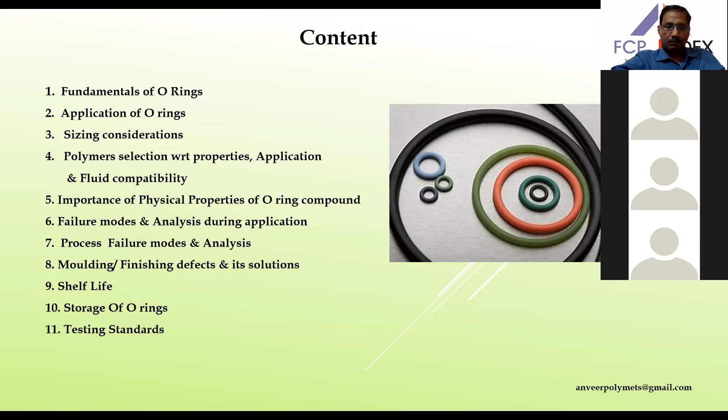So let's begin with the fundamentals. First, what is an O-ring? The name itself explains it — an O-ring is a circular cross-sectional ring molded from rubber or plastic. Why are we using an O-ring? O-rings are used to seal or block the path which may allow liquid or gas to escape.

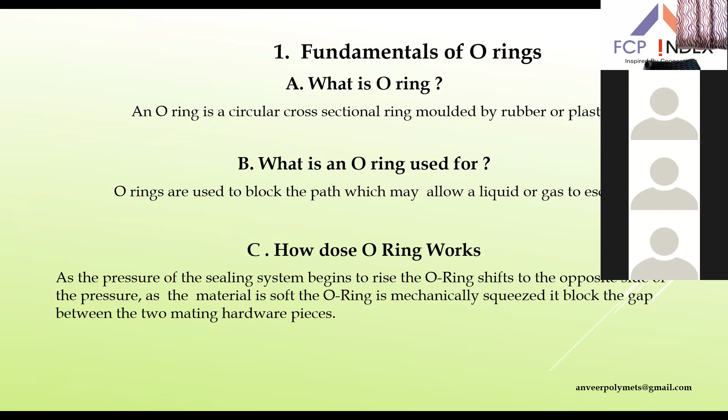And how does an O-ring work? As the pressure of the sealing system begins to rise, the O-ring shifts to the opposite side of the pressure. As the O-ring material is soft, the O-ring is mechanically squeezed and it blocks the gap between two mating hardware pieces. This is what actually happens with the O-ring during application.

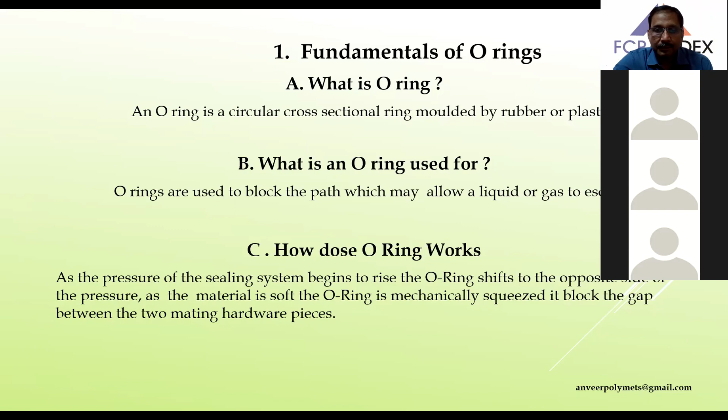Now let's move towards applications of O-rings. O-rings are applied for static applications as well as dynamic applications. In static applications, there are axial seals and radial seals; in dynamic applications, there are hydraulic and pneumatic seals, and rotary seals as well. So let's discuss more about the applications in detail.

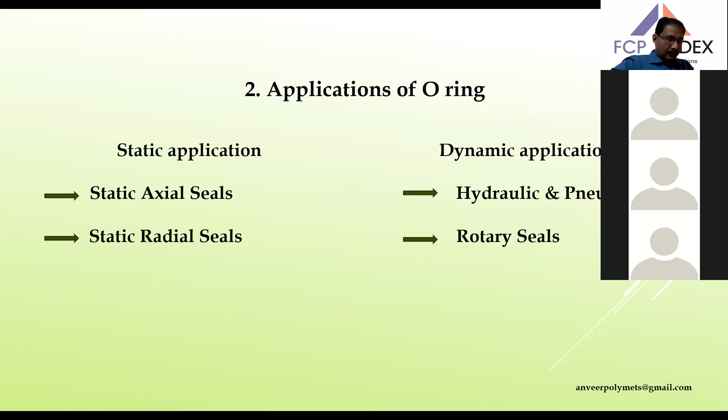So first is the static axial seal. In static axial seals, there is no movement during sealing — that's why it's called static. The sealing occurs parallel to the seal center line, that is, either the sealing is on top or bottom of the seal.

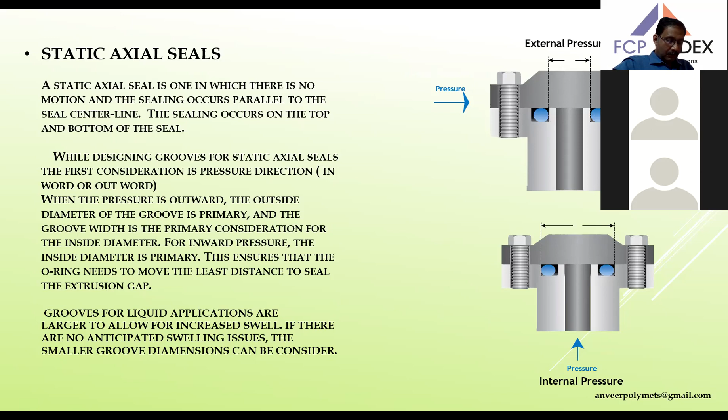So let's see the designing part. While designing grooves for static axial seals, the first consideration in mind is pressure direction, whether it is from inward or outward direction.

When the pressure is in outward direction, the outside diameter of the groove is primary consideration. And for inward pressures, of course, the inside diameter is primary consideration. This designing is important to ensure that the O-ring should move the least distance to seal the extrusion gap.

In liquid applications, grooves are larger because to allow the increased swell. If the swelling issue is not anticipated, smaller groove dimensions can be considered.

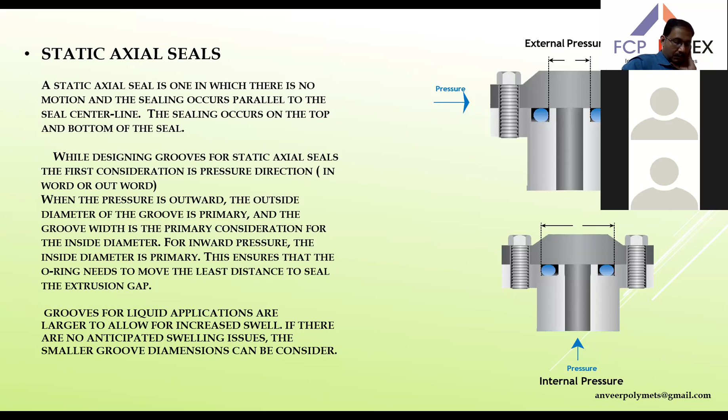Then static radial seals. In this type of applications, sealing surfaces are perpendicular to the seal, that is either on inner side or outer diameter of the side.

There are two variations of the radial seal. You can see a picture of it here. One is a piston seal where groove is on the piston, illustrated on the right side. And the second is a rod seal where groove is on the bore, shown on the left side.

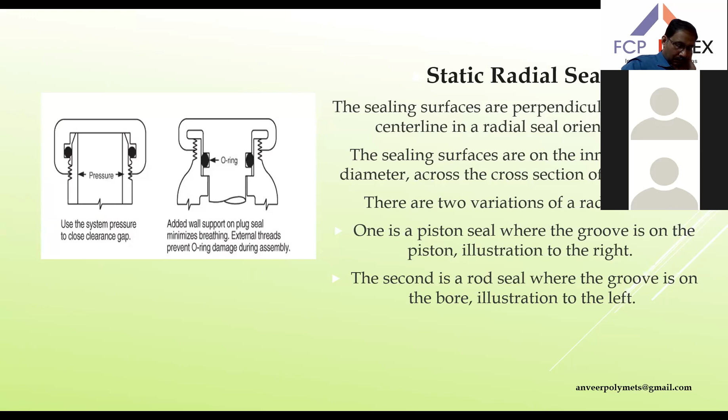Then second is a dynamic application. Dynamic sealing is basically associated with motions such as reciprocating, oscillating, and rotary motions. In dynamic reciprocating, O-ring type applications include hydraulic and pneumatic piston seals or rod seals.

In dynamic application, smaller diameter O-rings generally work well for short stroke applications. And if long stroke applications are there, then definitely thicker cross-sectional O-rings are good to perform.

There are a lot of damage modes because of the friction that occurs during sealing in dynamic type sealing applications. And for static type of O-rings, such problems are not observed because there is no friction at all.

To increase the lifespan and efficiency of the seal, the surface finish of the hardware is extremely important. The perfect hardware surface microfinish is generally between 10 to 20 micro inches.

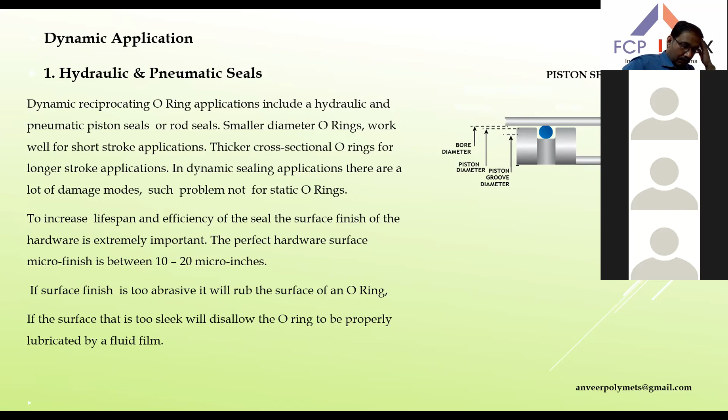A shaft hardness value of 55 Rockwell is typically required for successful rotary O-ring applications.

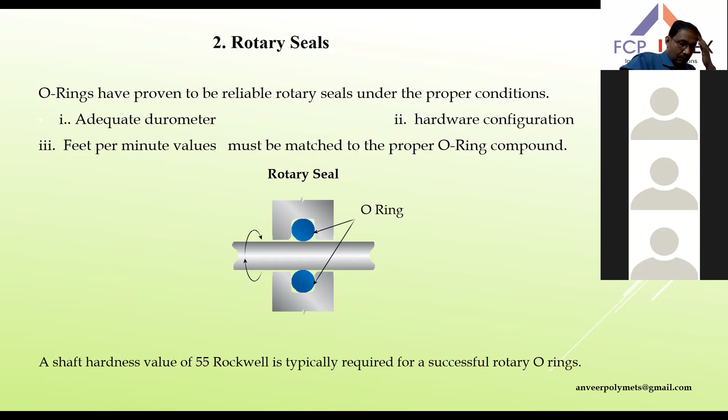So the next important part of the O-ring is its dimensions. When sizing consideration is there, there are three types of dimensions an O-ring has: one is the inner diameter, second is outer diameter, and third is cross section.

So first we talk about ID, that is inner diameter. In standard practice, ID of O-ring must be smaller than the mating hardware, so that it allows the O-ring to stretch within the groove.

Typically 2% stretch is recommended, but theoretical possibilities are we can go up to 1 to 5% also. But we always keep in mind that a higher level of initial stretch will decrease the performance of the ring. So proper inner diameter should be selected with respect to the groove diameter.

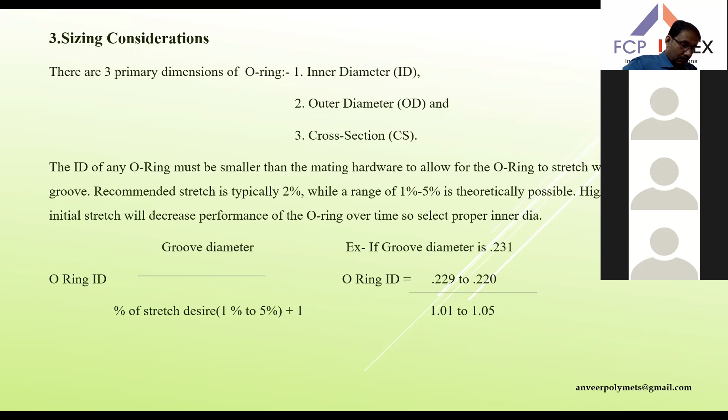So next important dimension is cross section of the O-ring. While designing, the O-ring cross section depends on the size of the gland. To create a proper amount of squeeze and to generate adequate sealing effect, the O-ring cross section must be larger than the gland height.

So the diametrical clearance, that is the gap between two mating hardware surfaces, is important because the O-ring gets squeezed into that extrusion gap and the sealing effect arises there. So that gap is important.

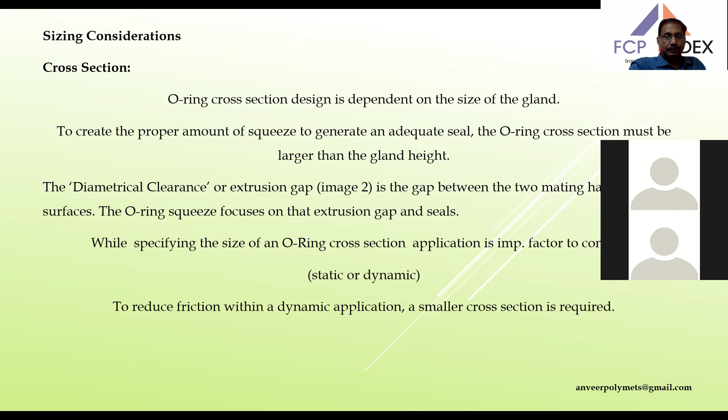Then O-ring cross section also depends on whether the application is static or dynamic, because to reduce friction in dynamic applications, smaller cross section is required. So by considering the application, we have to select proper cross section and its tolerances of the O-rings. So this is all about the dimensions of the O-ring.

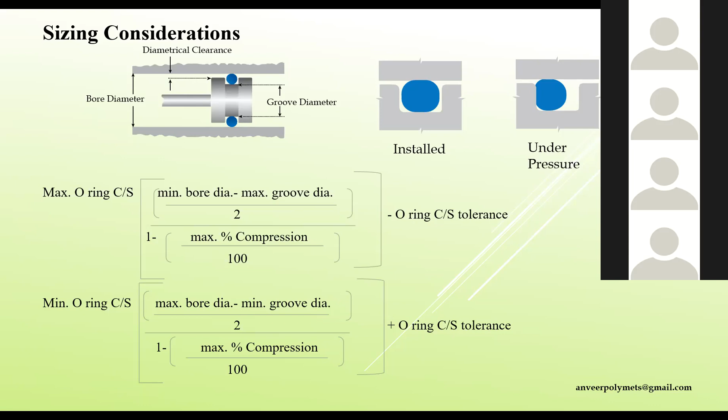Let's talk briefly about the main important factors, that is polymer selection. It's very important to select a proper polymer for proper application and proper results of our product.

First is nitrile rubber, also called NBR. General type of O-rings are generally molded by nitrile rubber. Temperature range is -25 to +120 degrees Celsius, and with special compounding chemicals, we can stretch that limit down to -40 degrees Celsius also.

Now properties of nitrile rubber. Nitrile rubber has good mechanical properties, like good tensile strength, tear resistance, abrasion resistance, elongation properties, and compression set property, which makes nitrile rubber suitable for most sealing applications.

Nitrile has an excellent resistance to petroleum-based oil, fuel, greases, and some hydraulic liquids. Nitrile also has moderate resistance to water, but good resistance to non-polar solvents. Non-polar solvents are chloroform, aromatic solvents, benzene, toluene, xylene, etc.

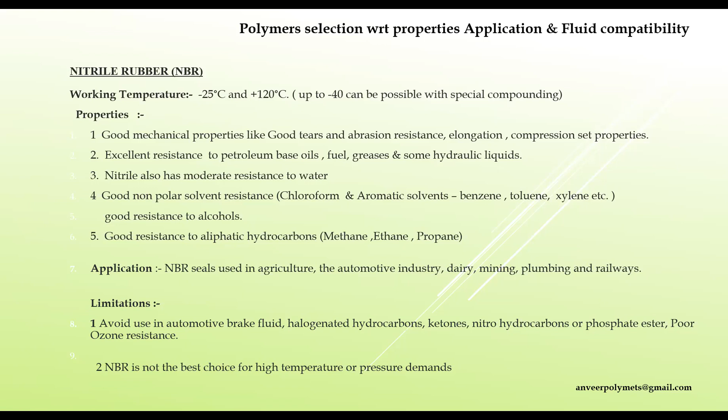Next is hydrogenated nitrile rubber, that is HNBR. HNBR is a modified version of nitrile rubber. The basic structure is the same, only the presence of hydrogen makes it something special in applications. The working temperature is -25 degrees Celsius to +150 degrees Celsius.

Now properties of HNBR. The tensile strength, tear strength, elongation, and abrasion resistance properties are excellent compared to nitrile rubber. HNBR has excellent mechanical properties as compared to nitrile rubber. It has good resistance to ozone, sunlight, and other atmospheric environments, which nitrile rubber doesn't have.

HNBR has better oil, fuel, and chemical resistance, and it also withstands much higher temperature than nitrile rubber. It has excellent resistance to many chemicals like heat, hot water, steam. It also performs well in petroleum-based oils, fuels, aliphatic hydrocarbons, vegetable oils, greases, glycols, silicone oils.

Usually HNBR is cured by a peroxide curing system, but it can also be cured with sulfur to improve flexing property in dynamic systems. Contrary to that, we have to compromise on compression set properties with sulfur curing. Peroxide curing gives better compression properties like heat resistance, also better in peroxide cure systems.

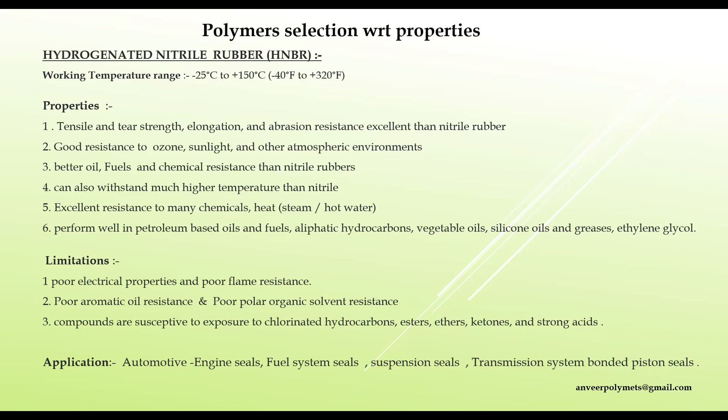Now applications. We can use HNBR seals in automotive engine seals, fuel system seals, suspension seals, transmission system bonded piston seals. So that's all about HNBR.

Next is EPDM, ethylene propylene diene monomer. Temperature range is -45 to +125 degrees Celsius. With the help of a peroxide cure system, we can go up to +150 degrees Celsius also. EPDM has resistance to brake fluid based on glycol up to 150 degrees Celsius.

Of course, EPDM has hot water and steam resistance. It has good resistance to hydraulic fluid based on phosphate esters, resistance to organic acids as well as inorganic acids. Organic acids are such as formic acid, citric acid, and inorganic acids are sulfuric acid, hydrochloric acid.

It has resistance to silicone-based oil and greases. Polar solvents such as ketone, ester, and alcohols resistance is also good in EPDM. Most commonly, EPDM rubber seals are used where ozone resistance, UV radiation properties, or weather resistance properties are required. Sometimes EPDM rubber can be compounded to provide excellent electrical resistance also.

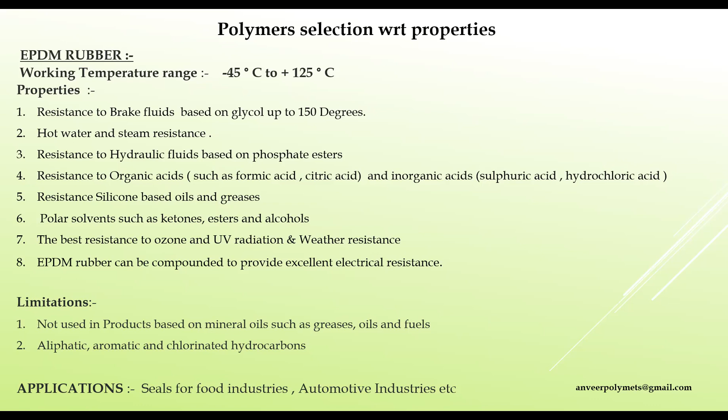Next is polyacrylic rubber, that is ACM. ACM polyacrylic has a working temperature range of -10 to 150 degrees Celsius. Polyacrylic rubber has an incredibly high resistance to hot hydraulic oils and oxidation, which makes this rubber ideal for use in hydraulic machinery and equipment.

The resistance to petroleum oils and high temperature is very good. Polyacrylic is naturally resistant to ozone and weathering, so it is superior in that area of application compared to nitrile. For weathering resistance, polyacrylic performs well compared to nitrile. It also has resistance to mineral oils.

Limitations include polyacrylic having poor water resistance, and low temperature resistance is very low. ACM is not suitable for applications where temperature below -10 degrees Celsius is a consideration; below -10 we cannot use polyacrylic. It has a poor level of acid resistance and alkali resistance. ACM has very low resilience in temperature below 70 degrees Celsius. Applications: we can use polyacrylic seals in automotive industry, including gearboxes, engines, power steering, and transmission systems.

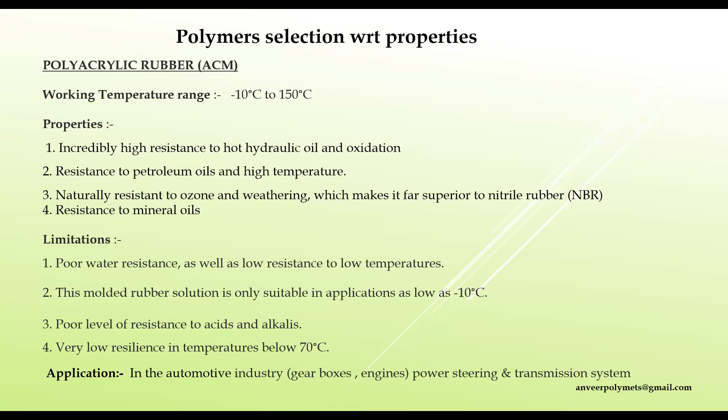The next one is silicone rubber, VMQ, that is vinyl methyl silicone. Silicone is the rubber which has a wide temperature range of application, from -60 to +270 degrees Celsius. It can even be tolerated up to greater extremes, like -100 degrees Celsius to 300 degrees Celsius, but of course only for a limited period of time, not for continuous use. Hence, silicone is an ideal choice for applications where both high and low temperature factors are required.

Properties of silicone rubber: the main property is its insulation and flame retardant resistance. It has great resistance to oil, solvent, grease, and brake fluid. It can be used for hot air applications, engine and transmission oils. It offers excellent compression set properties, great low temperature flexibility, and outstanding weather and ozone attack resistance.

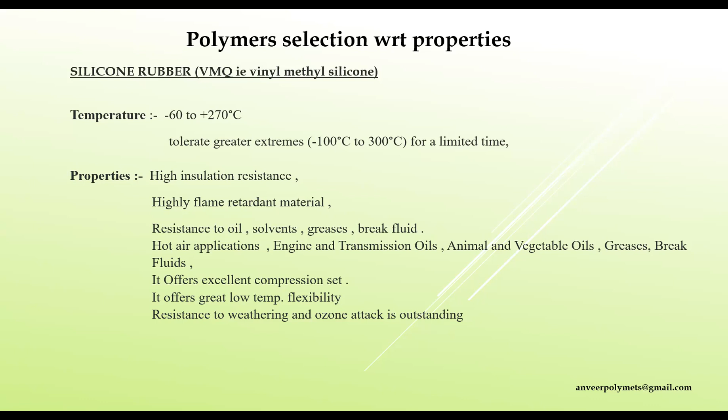Now, limitations. In spite of having excellent compression set, it has low physical properties, like low tensile strength and poor tear resistance, which makes it not suitable for dynamic sealing applications. It has a high gas permeability rate. It is not resistant to superheated steam, and cannot be used in acid and alkaline mediums. It is not recommended for hydrocarbon based fuels, that is gasoline, propane, diesel. Aromatic hydrocarbon resistance is also poor, as is resistance to aromatic mineral oils.

It has low resistance to abrasion and tearing, so it can be used only for static applications rather than dynamic applications, because dynamic applications require great abrasion resistance, best tear strength, and good tensile property. These are requirements for dynamic sealing which silicone does not meet at all. Applications: silicone seals are generally used in FDA and medical devices, commonly in pharmaceutical industries, and as it is a fire resistant material, it is also used in firefighting equipment.

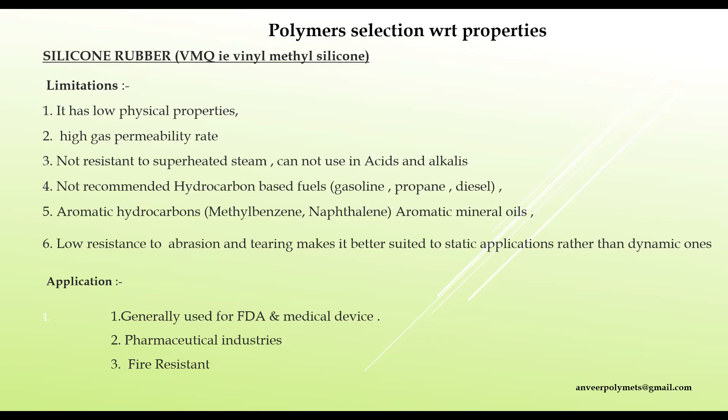Next one is fluorosilicone, that is FVMQ. The working temperature is -57 to 205 degrees Celsius. The difference between silicone and fluorosilicone is the fluorine content in it, and that fluorine content makes fluorosilicone better than silicone. It has excellent temperature resistance property and is stable in extreme temperature environments. It has improved mechanical properties compared to silicone.

It has great resistance to fuel, oil, and chemicals, and is a high flame and insulation resistance material. Applications include fluorosilicone seals used in automotive, aerospace, fuel industries, electrical equipment seals, engine gaskets, jet fuel systems, and gas turbine seals. Now, limitations: it has poor abrasion resistance, poor tear resistance, and is not recommended for ketones like acetone and exposure to organic acids.

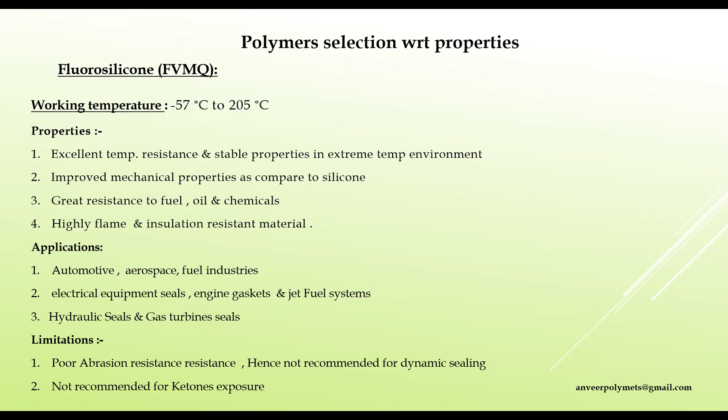Next one is chloroprene rubber, that is neoprene. Temperature range is -35 to 100 degrees Celsius. Neoprene has an excellent balance of physical and chemical properties that makes it suitable for a range of applications. It has moderate resistance to petroleum-based oil and fuels, but better chemical, oil, ozone, and heat resistance than natural and nitrile rubber.

It is a self-extinguishing rubber. Neoprene rubber is one of the few self-extinguishing rubbers, so it is used where flame resistance properties are required. Neoprene rubber is the prime choice for it.

It has gas permeability relatively low and a good level of rebound resilience. Neoprene contains chlorine atom in it, and that's why the self-extinguishing property of the rubber is because of the presence of that chlorine atom in it.

Limitations of neoprene: it exhibits poor electrical properties, so it is not recommended for electrical insulation. It has poor resistance to strong oxidizing acids like esters, ketones.

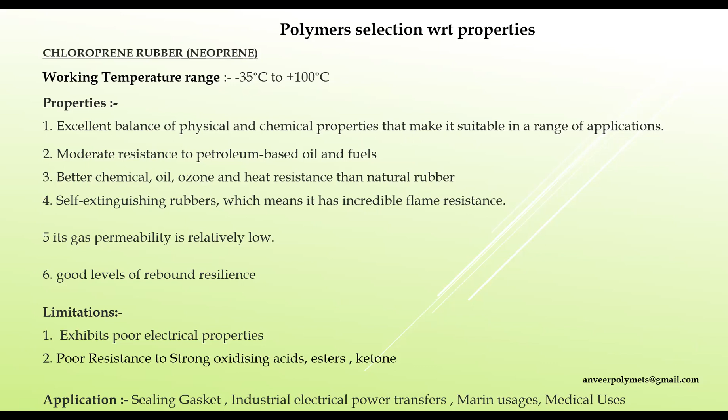Usually called viton. Working temperature is -20 to +200 degrees Celsius. Viton is a highly fluorinated polymer, so it offers exceptional performance in extreme hot and corrosive environments because of the presence of fluorine in it.

The advantages of viton rubbers: it has exceptional temperature stability at extreme highs. It is chemically compatible with most chemicals like fuel oils, hydraulic oil, vegetable oils, octane, gasoline, alcohols, concentrated acids, and mineral oils. Oil resistance is excellent in viton rubber, and aromatic petroleum solvent resistance is also excellent.

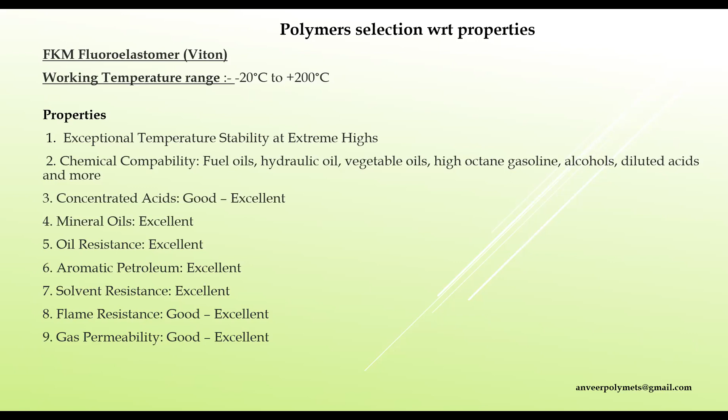Now, applications of viton O-rings. They are majorly used in aircraft O-rings or automotive components. FKM seals are used in corrosive environments, as the fluorine content makes it special for special applications.

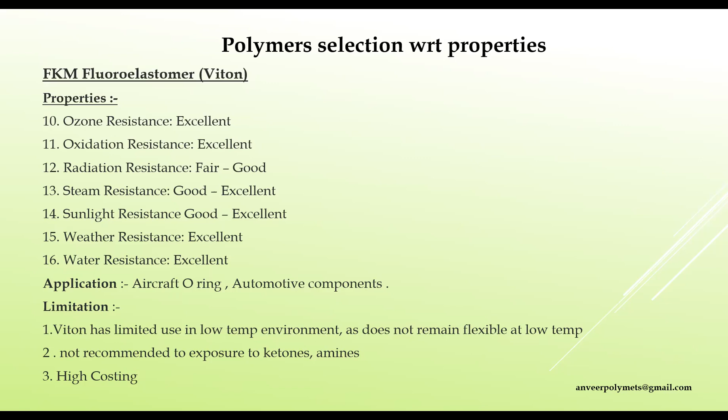Limitations of viton: it has limited use in low temperature environments because it does not remain flexible at low temperature for a long time. It is not recommended for exposure to ketones or amines, and a second limitation is high cost.

Now tetrafluoroethylene propylene, that is AFLAS. It has excellent temperature and chemical performance. Working temperature is -10 to 230 degrees Celsius. It has resistance to petroleum oil, steam, amines, and chemical resistance to strong acids and bases. It has high electrical resistivity, ozone resistance to polar solvents.

It has resistance to polar solvents, ozone resistance, and resistance to radiation to some extent. Applications are in aerospace, steam, hot water up to 204 degrees Celsius, and oil-field applications. Limitations of AFLAS: it is not recommended for chlorinated hydrocarbons such as trichloroethylene, ketones, and acetic acid environments.

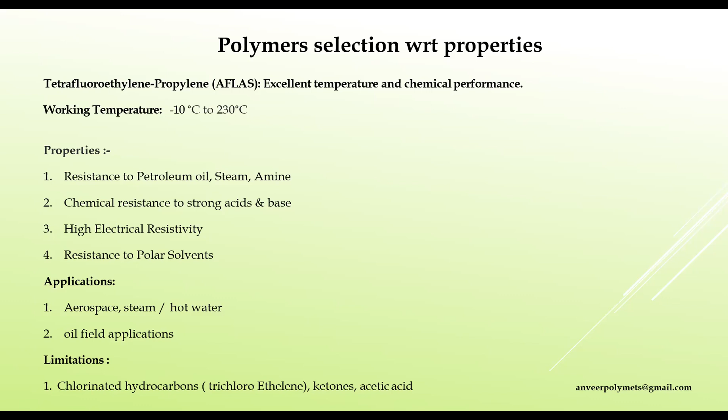Next, FFKM, that is perfluoroelastomer. Perfluoroelastomer has the highest performing temperature and chemical properties of any elastomer class. Temperature range is -55 to 330 degrees Celsius. It has low outgassing and extractable properties, high temperature resistance, and improved chemical resistance compared to FKM because it contains a higher percentage of fluorine than FKM.

FFKM has resistance to about 1800 plus different chemicals, hence it is majorly used for most challenging applications. Outgassing property means the release of gas when it is exposed to heat or vacuum, and that gas will condense on other materials and can interfere with the performance of that seal. So low outgassing properties is important.

Applications: FFKM seals are used in semiconductor, energy, pharmaceutical, and industrial industries, used in environments with high temperature or harsh chemicals involved. It's also used for aerospace application seals and vacuum applications.

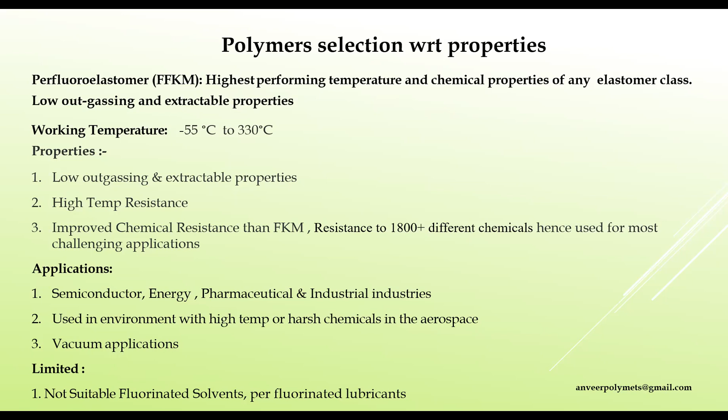So that's all about the polymers which are used in molding of O-rings. Now, the importance of physical properties on O-ring applications. Physical properties like hardness and tensile strength are key. So why is hardness important in O-rings?

One of the key factors in getting the right O-ring for your application is getting the right hardness for your product. Hardness is a measure of resistance of the material, measured in Shore A durometer. Higher the durometer, harder is the compound. In general, 70 Shore A durometer hardness should be used in standard practice because 70 hardness compounds offer the best combination of properties required for most O-ring applications.

The softer the elastomer, the higher the coefficient of friction. Soft elastomers also have better seal material conformance to the surface to be sealed, and low pressure is required to create a seal in softer hardness. So this property is important in low pressure seals which are not activated by fluid pressures.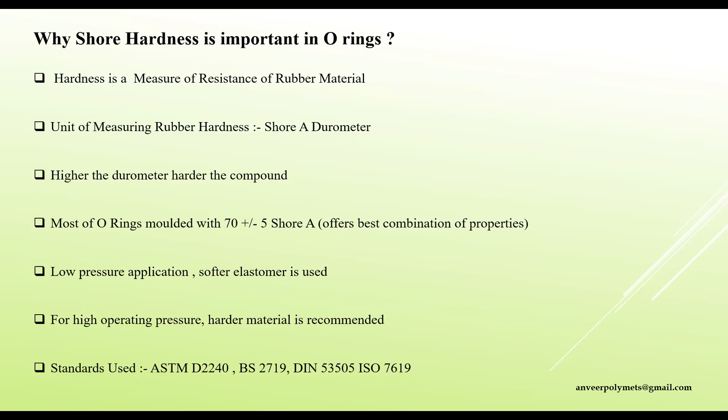Next important property is compression set. Compression set is the percent of deflection that the elastomer fails to recover after a fixed period of time under specific squeeze or stress and temperature.

Standard used for compression set is ASTM D395.

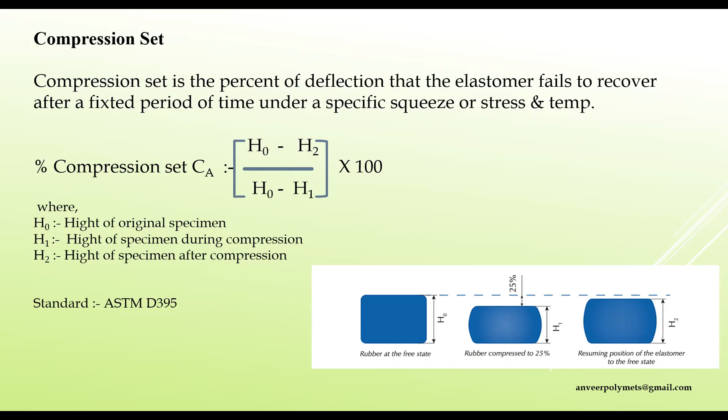Next is tensile strength, percent elongation and percent volume swelling. These three properties play an important role in performance of the O-ring because they indicate the deterioration of the compound or seal after it has been in contact with the testing fluid or system fluid for a long period of time. Larger the reduction in the properties indicates poor performance of the seal. The standard used for testing is ASTM D412, DIN 53505, BS 903.

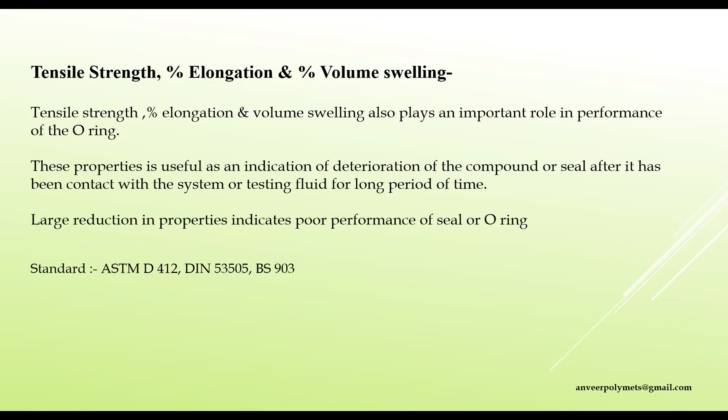Now let's talk about the failure modes, the general factors affecting O-ring failure during application. O-ring application failure depends on various environmental factors like improper gland design. Gland designing is very important because it allows too much or too little compression room to the seal.

Second is the incorrect O-ring size. Third is the incompatibility of the O-ring elastomer and the environmental element. Also improper O-ring installation and inadequate O-ring lubrication. These are the factors which adversely affect the performance of the O-ring.

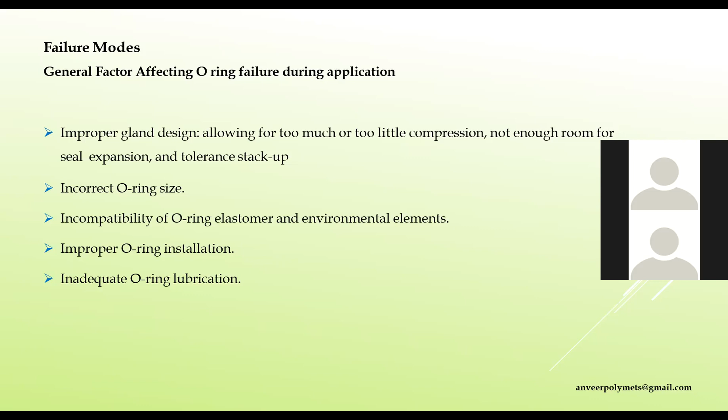Then failure modes caused by improper designing of compound and gland. We use O-ring as a seal where a combination of stresses is applied on the O-ring, which are very complex and difficult to evaluate. Therefore, it is very important that the O-ring compound and size should be tested in the real environment of its service. The following types of failures can occur during testing or during application.

The first failure is compression set failure. The most common cause of O-ring failure is compression set. An effective O-ring seal should require a continuous seal line between the seal surfaces.

No excessive deformation should occur on the O-ring, so that the sealing factor is maintained. If excessive deformation occurs, then the sealing factor is not maintained in the proper way. So compression set values are very important in that aspect. Lower the percent of compression set value, higher the performance of the O-ring. So these are the factors.

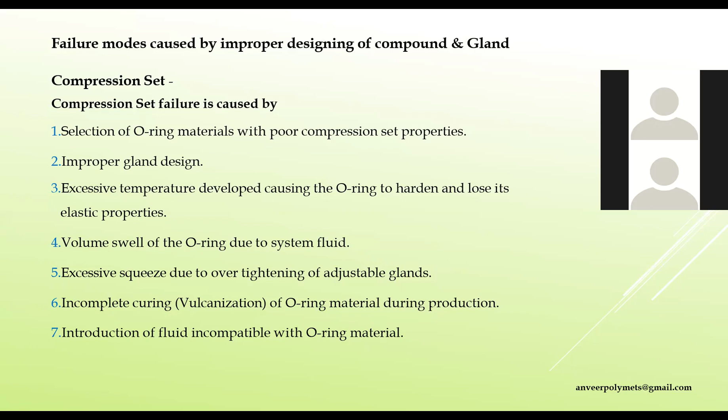Then preventions. We can prevent this by choosing low set O-ring materials, by selecting O-ring material which is compatible to service conditions. We can reduce system operating temperatures. We can check the frictional heat buildup at the seal interface and reduce it if excessive heat is generated. We can inspect the incoming O-ring shipment for the correct physical properties.

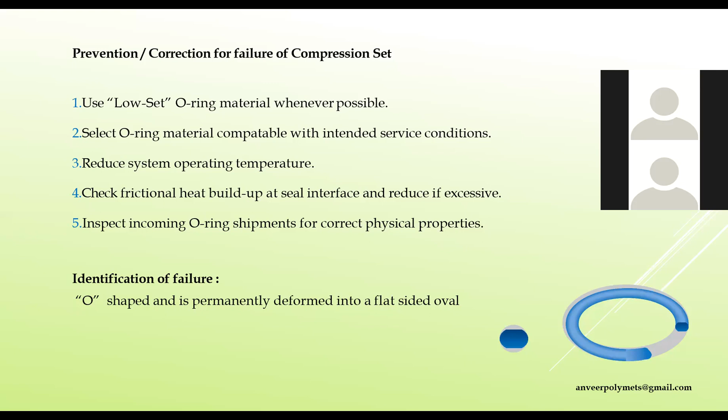Next is extrusion and nibbling. Extrusion and nibbling of the O-ring is primarily a cause of seal failure mainly in dynamic applications, and in static applications this is subject to high pressure. If very high pressure is applied in a static application, then such type of problem may be encountered. Then failure analysis of extrusion and nibbling failure.

First is excessive clearance. If excess high pressure is applied, that is pressure greater than that designed for the system, then such type of failure may be observed. If O-ring material is too soft, it cannot withstand the pressure. Next is if degradation occurs. Degradation is in the form of swelling, softening, shrinking, or cracking.

Next is irregular clearance gap caused by eccentricity. This type of failure is also observed. Increase in the clearance gap due to excessive system pressure leads to failure. Improper machining of O-ring glands, that is, if sharp edges are there, then also this problem occurs. Improper size, that is, too large an O-ring is installed, causing excess filling of the groove.

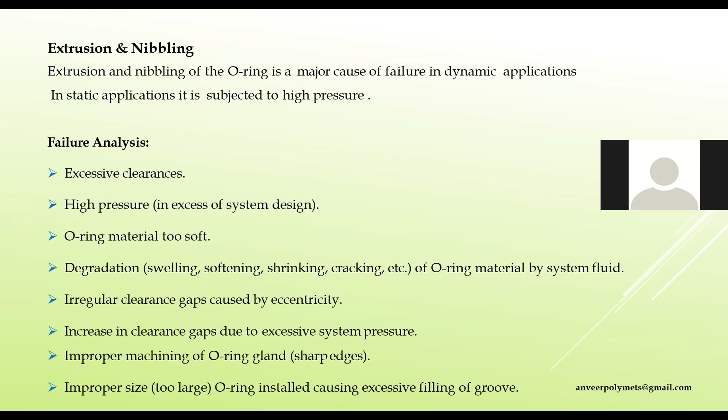So preventions for this: one is we can decrease the clearance by reducing machining tolerance. One can use backup devices. We can check O-ring material for compatibility with the system fluids. We increase the rigidity of the metal component. We replace the current O-ring with a harder O-ring, or we break the sharp edges of the gland. We can ensure the installation of proper size O-rings. We can also use alternative seal shapes.

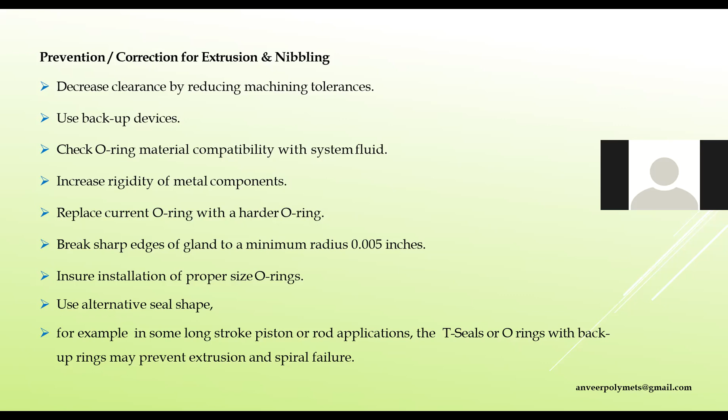For example, in some long stroke piston or rod seal applications, the T seal or backup rings may be used to prevent extrusion and spiral failures. Then identification: here is the image which shows the extrusion and nibbling failure.

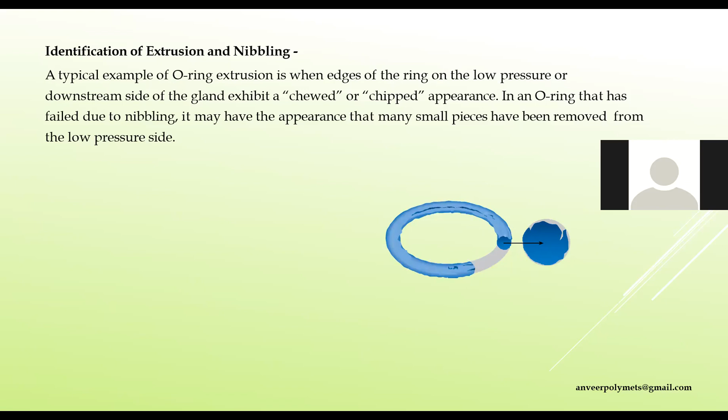Now abrasion. The abrasion failure is only observed in dynamic seals, subject to movements, whether reciprocating, oscillating, or rotary motion. The failure analysis is, it is because of improper finish of the surface in the dynamic contact with the O-ring. This surface may be too rough, acting as an abrasive, or it may be too smooth, causing inadequate lubrication due to inability of the surface to hold the lubricant.

Next, if improper lubrication is provided by the system, if excess temperature is generated by any reason, it can lead to abrasion of the seal. The next cause is contamination of the system fluid by abrasive particles.

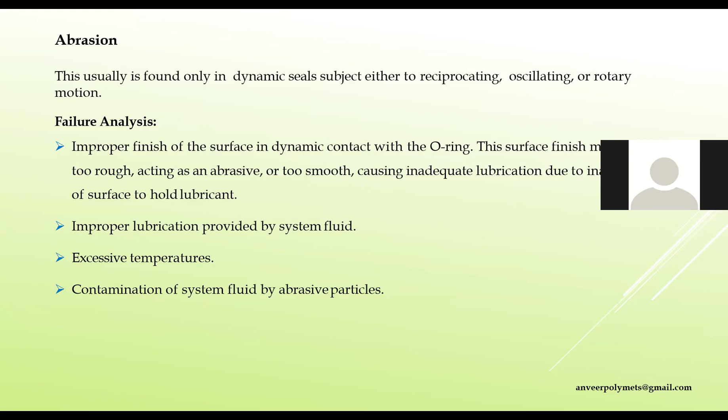Then how can we prevent this problem? We can minimize this by use of properly surface-finished material. We can provide adequate lubrication by use of proper system fluids. We can internally lubricate the O-rings to reduce friction and wear. We can also check for contamination of the fluids, and to eliminate the sources, install filters if necessary. We can consider changing the O-ring material to one with improved abrasion resistance.

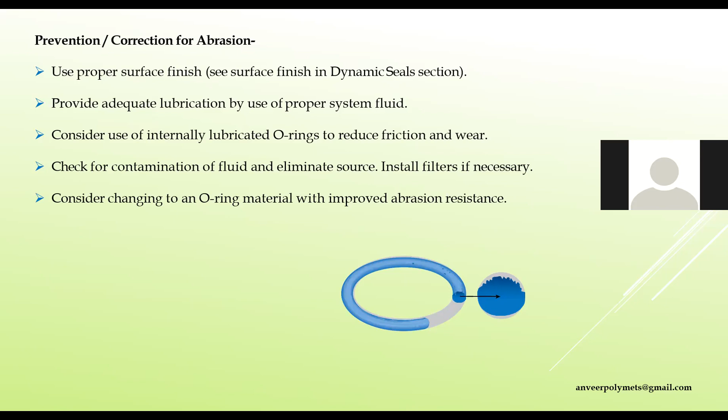Here is the image showing the abrasive section of the O-ring, how it looks in failure when abrasion resistance failure is observed.

Then next is the installation damages. In spite of its simple appearance, the O-ring requires care during installation, because installation can directly contribute to its O-ring performance failure.

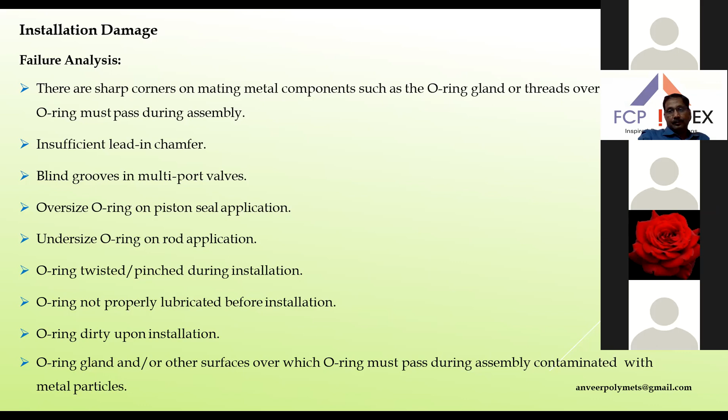So the failure analysis: if there are sharp corners on metal components such as O-ring glands or threads over which the O-ring passes during assembly, it leads to damage. Insufficient lead-in chamfer, or if there is a blind groove in multi-port valves, can also damage the O-ring. If an oversized O-ring is applied for piston seals, if an undersized O-ring is applied on rod seals, or if the O-ring gets twisted during installation, then also it can damage the O-ring.

O-ring not properly lubricated before installation is also one of the causes. If the O-ring glands or the surface on which the O-ring must pass or rest is contaminated with metal particles, then also it can damage the seal.

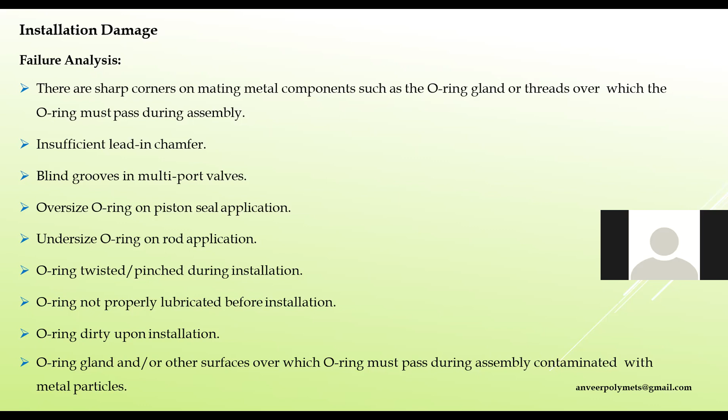Then prevention. How can we prevent this? It's important to break all sharp edges on metal components by providing a lead-in chamfer. We have to check all components for cleanliness before installation. We have to tape all threads over which the O-ring will pass. Use O-ring lubricants, and the lubricant must not contaminate the system fluid either—that is also an important factor to keep in mind. Then double-check the O-ring to ensure the correct size and material. So these are the precautions we have to take while installing O-rings.

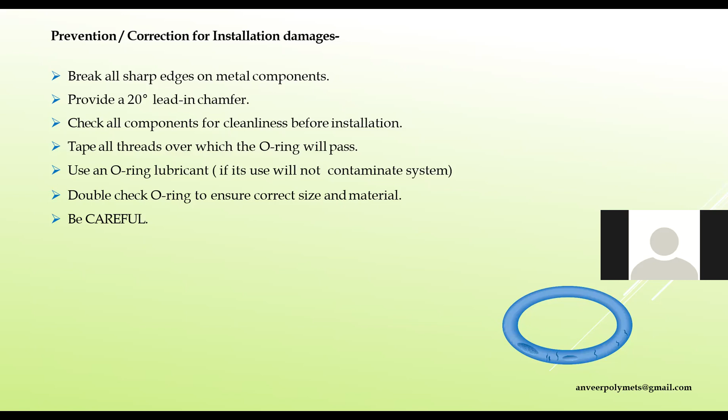Then explosive decompression. As the system pressure decreases, this type of failure may occur. Explosive decompression is also termed O-ring embolism. In this, after a period of service under high pressure, when we reduce the pressure too rapidly, the gas trapped within the internal structure of the O-ring expands, which leads to small ruptures or embolisms in the O-ring surfaces, and that rupture causes failure of the seal.

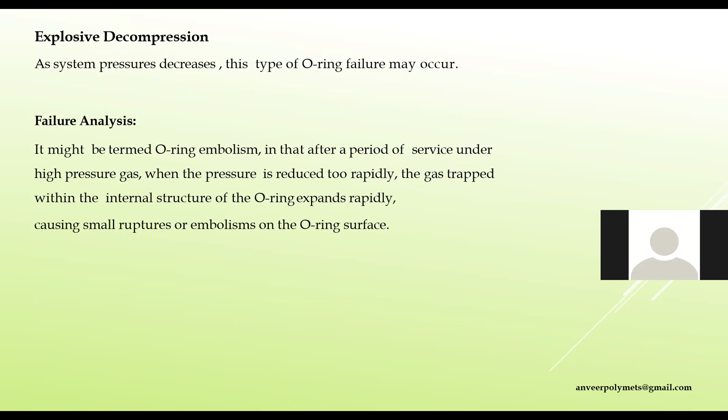So prevention: we can increase the decompression time to allow the trapped gas to work its way out of the seal material. Then we can choose seal material with good resistance to explosive decompression. Then third, if the problem persists and pressures are very high, we have to use metal seals rather than rubber or polymer seals. Identification: there are small pits or blisters on the surface of the O-ring which indicate failure by explosive decompression.

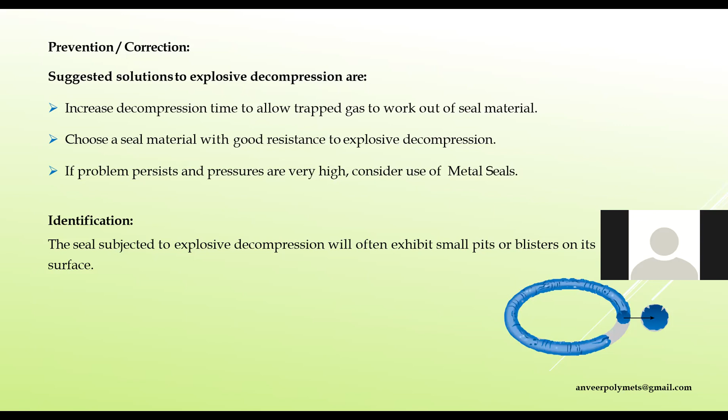So now molding defects - that is, during production, which defects occur and how we counter that.

First is mold fouling. If the residue is allowed to remain on the mold for a long period of time, it gradually builds up in thickness and eventually causes molding defects to the finished part. Prevention is, after each number of strokes we have to clean the mold, and proper release agent should be used on the mold.

Second is blistering. Blistering is caused by uncured rubber compound. Prevention is we have to give proper cure time and temperature, and if necessary, we have to cross verify the recipe for the compounding.

Then contamination. Contamination of the finished part is a result of foreign material in the raw rubber compound. The prevention is we have to keep the working area clean and neat in every stage of production, and proper handling is required.

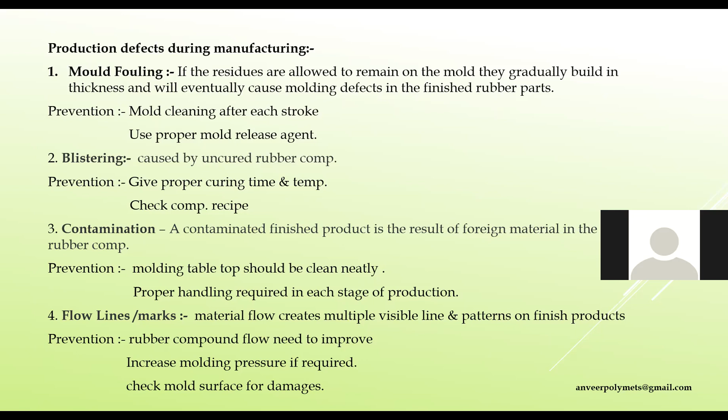Then flow lines. The material flow creates multiple visible lines or patterns on the finished product - this is called flow lines. If the rubber compound has low flow property or less flowing property, then such lines may occur. If the molding pressure is low, this problem may also be encountered. So we have to increase the molding pressure if required, and we have to check for mold surface damages. These are the preventions.

Then short molding. Short molding is when the part is rubber-short or an incomplete molded part is observed. Prevention is we need to increase the molding pressure or die closing speed, check the die closing speed, or if necessary rectify the rubber compound.

Air traps. Formation of air pockets on the surface of the part causes the air trap problem. It is identified when on the O-ring, small air pockets are seen. Prevention is holding correct pressure, as mold not being correctly centered may cause this problem to be observed.

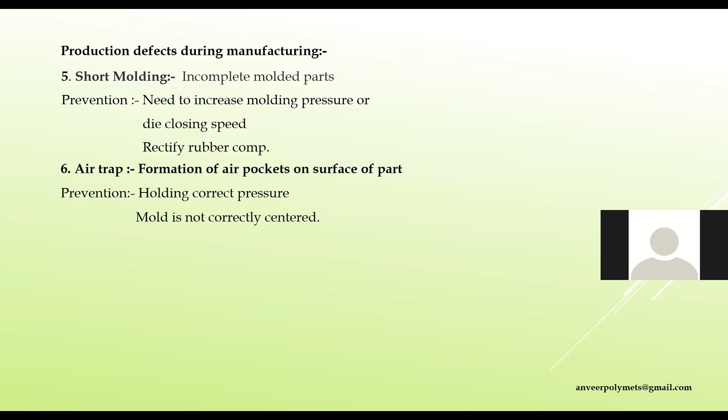The next one is shelf life of the rubber O-ring or rubber molded product. For thermoplastic, it is 4 years. For nitrile, HNBR, CR it is 6 years. EPDM has 8 years of shelf life because EPDM has good weather resistance property, so we can store it for a longer time. FKM, silicone, fluorosilicone has 10 years of shelf life. FFKM has 18 years of shelf life. PTFE we can store for an unlimited period of time. For fluorosilicon or FFKM, the presence of fluorine atoms gives more environmental resistance, so the shelf life increases accordingly. These guidelines are taken from the ISO 2230 DIN 7716 standard.

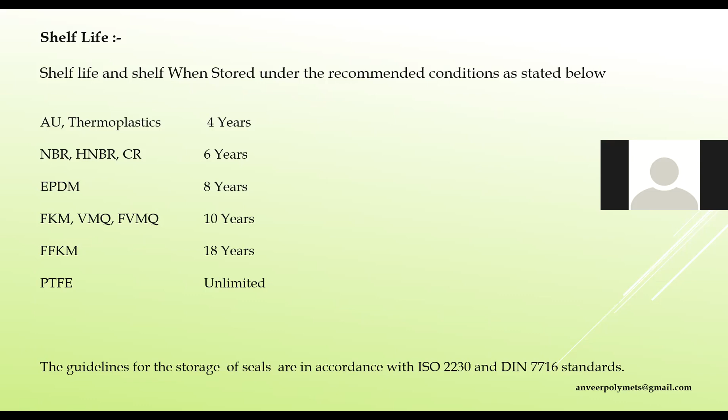Then storage recommendations. We have to keep the storage area cool, dry, and moderately ventilated, with as little dust as possible. We have to avoid outdoor storage. The most favorable storage temperature is 15 to 25 degrees Celsius. We should wrap the seals and store them in airtight containers, protecting them from atmospheric changes. The elastomer product should not be subject to tension, compression, or any form of load during storage, as it can form permanent deformation or cracks on the product.

Seals made of different materials should not be in contact with each other. This is very important when different color products are present - we have to keep different color products in different containers to avoid discoloration problems. The seals should be stored for the shortest period possible, and we have to use the first-in, first-out method. These storage guidelines are in accordance with the ISO 2230 DIN 7716 standard.

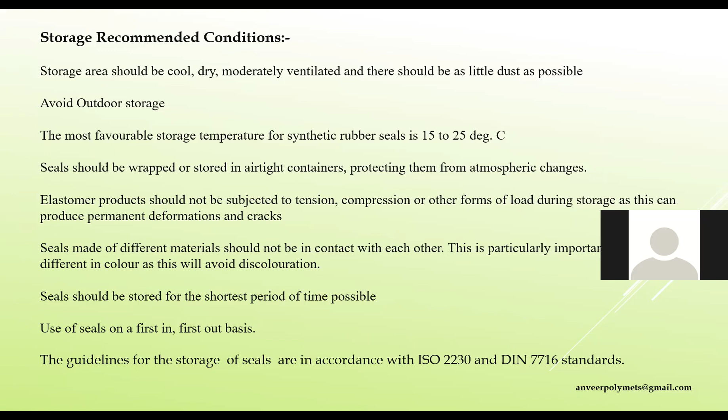Here is the list of standards with detailing. SAE, military standard, BS, ISO, and DIN standards are used for testing and inspection guidelines of the O-rings.

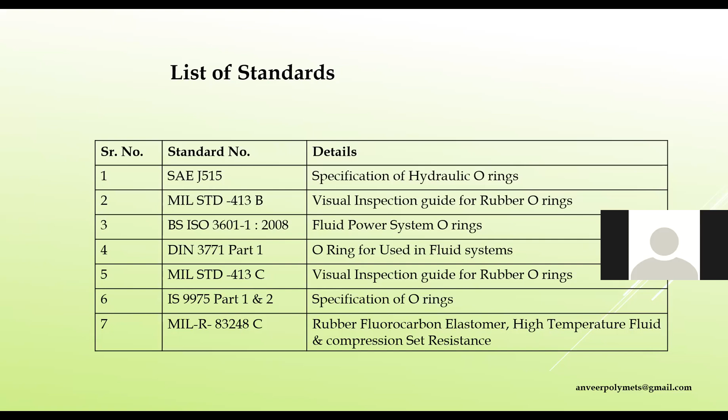So it's all about O-ring.